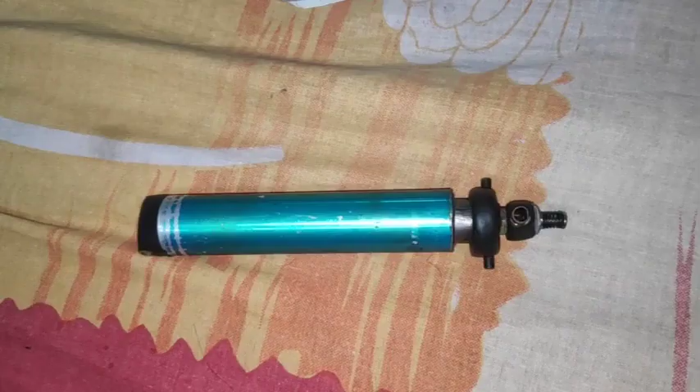A lot of my viewers asked me to show how this mechanism works. This is an all-in-one package: air pump, compression chamber, a valve, an inlet valve. It's a complete package. You don't need an external pump or anything else, just fit this in a gun and you're ready to go. It fills up by itself when you pump it, and it stores a lot of air inside. So this video is for educational purposes.

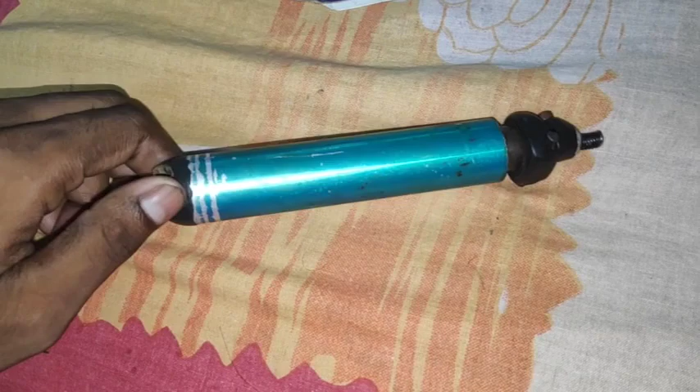Watch this video till the end, because I'll be explaining how this part works. This is a very good technology because it reduces the number of components needed for an air gun, and it has a lot of power. You can hunt small game with this mechanism in .177 or .22. I wouldn't recommend using it for .25 in a pistol, but if you use a big rifle barrel, you can use it for .25. For a pistol, stick to .177 or .22.

Watch this video till the end, because I'll be explaining a lot of things. So let's start. I have drawn a diagram of this system. I'll be dismantling this thing in a few minutes, but let me first explain the parts inside.

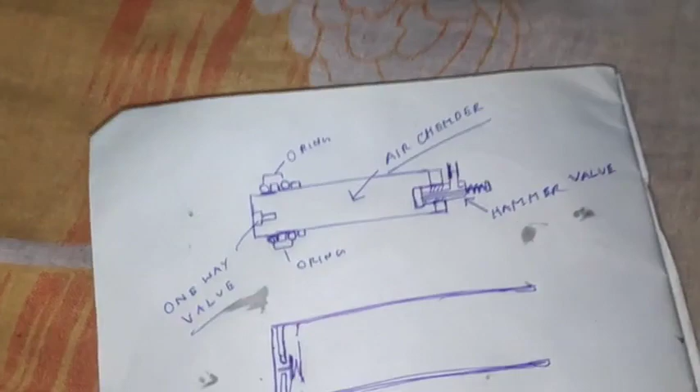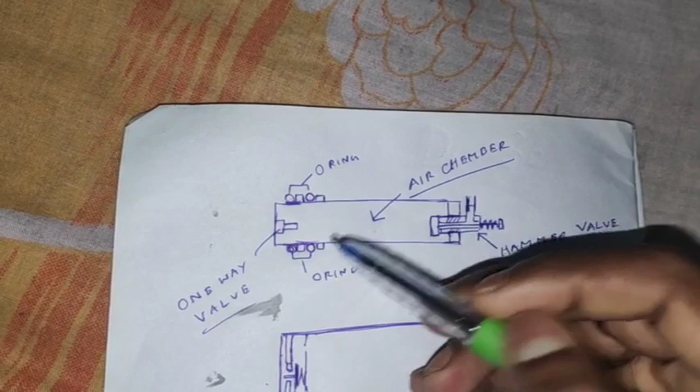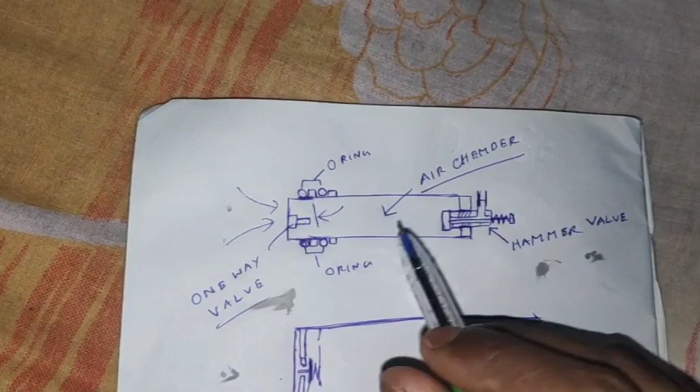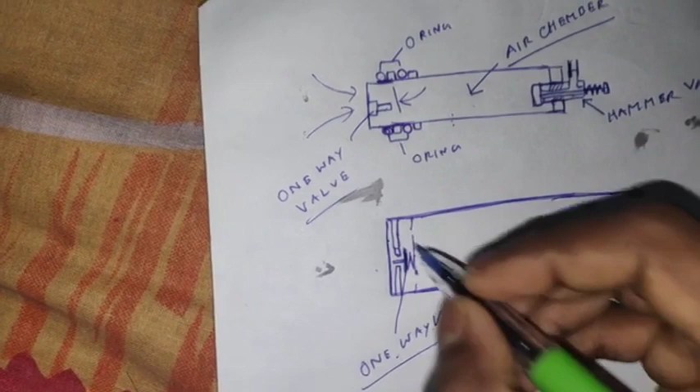First, this is the air chamber, and these are the O-rings, connected like a ring. I've shown this in a diagram, so it's chopped in a half pattern. This is the valve or hammer valve, and this is the one-way valve. The air can come through here, but it won't let the air go out. This is the outer part, which has one component only, the one-way inlet valve.

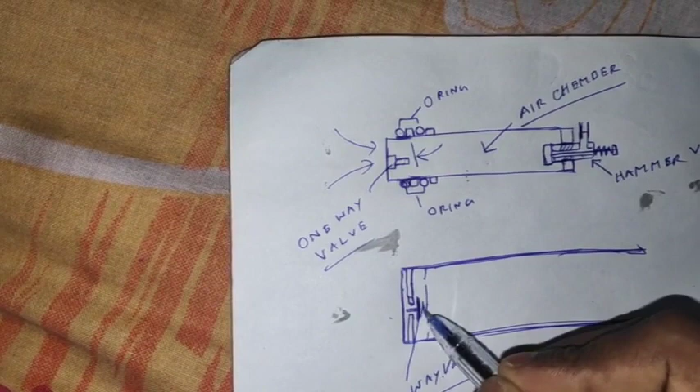This valve design is a bit different, because if I used the other type of valve, it would take up a lot of space. So I've used a tappet type valve with a spring, which pushes down and locks the air inside here.

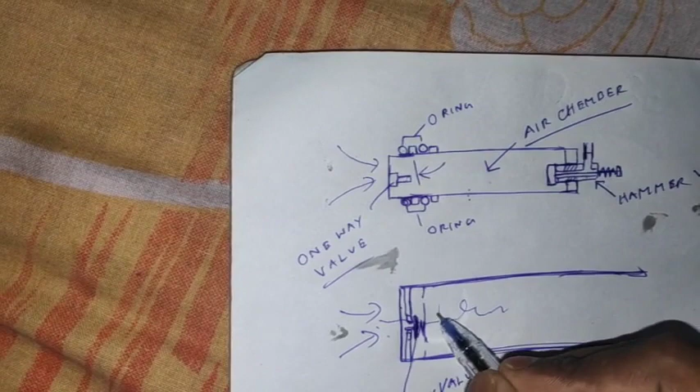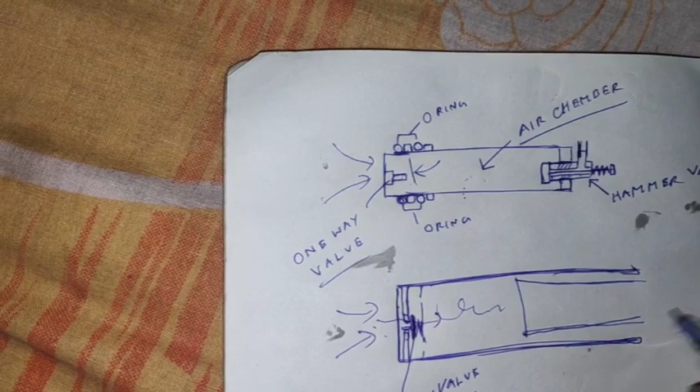So when the air comes in, it comes through here when this thing is inside here. Just imagine this thing is inside here. Let me draw this for you. This is the O-ring.

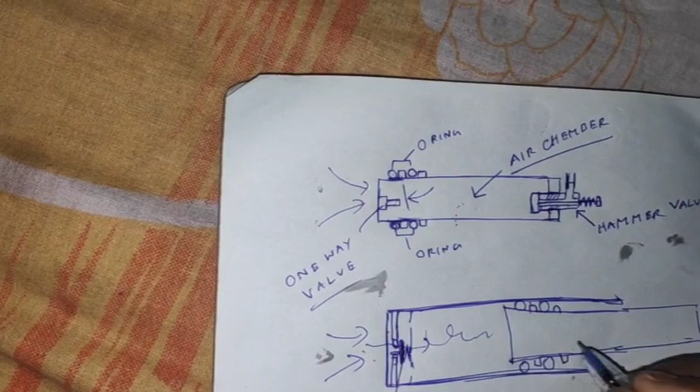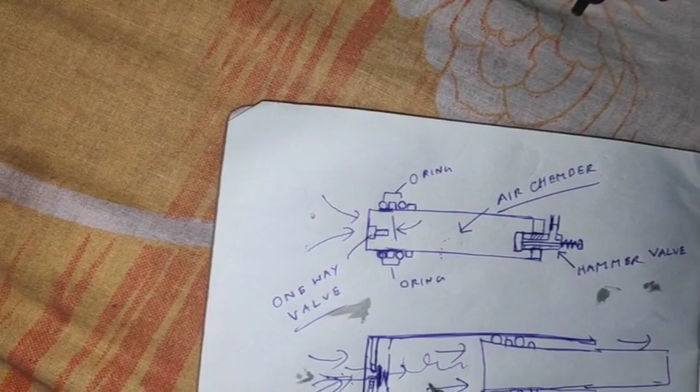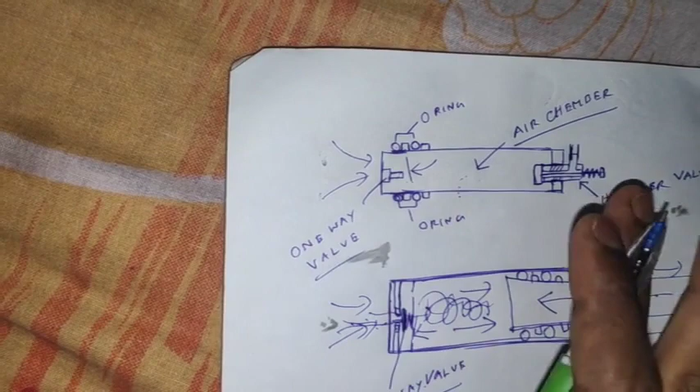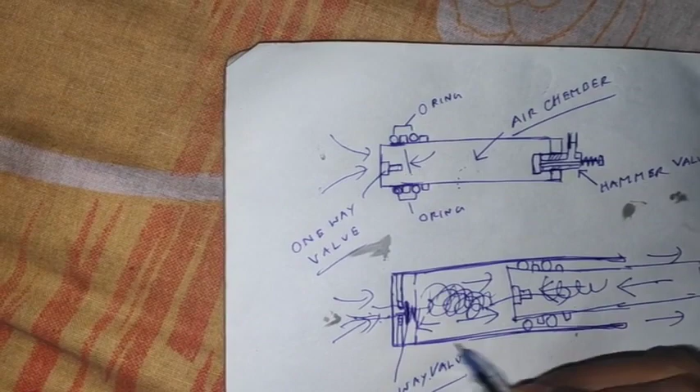Imagine I am pushing this down or pulling this thing this way. So the air is coming through here. Because this is a one-way valve, the air can come through but is stored over here. But when I push this thing back again, the air cannot go out because it is stopped. Then this valve comes into play, letting the air come inside and be stored over here. So that is one pump.

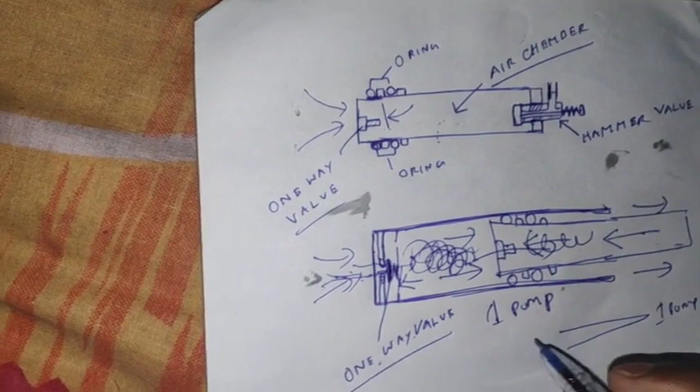From this motion to this motion, one pump. So if I continuously pump it, 1, 2, 3, 4, 5, 6, 7, all the air coming inside here gets dumped within here.

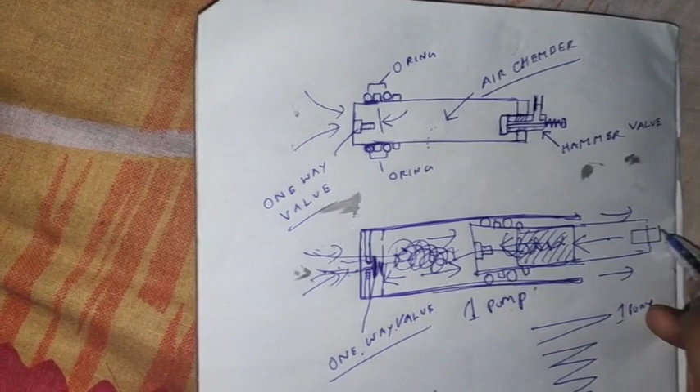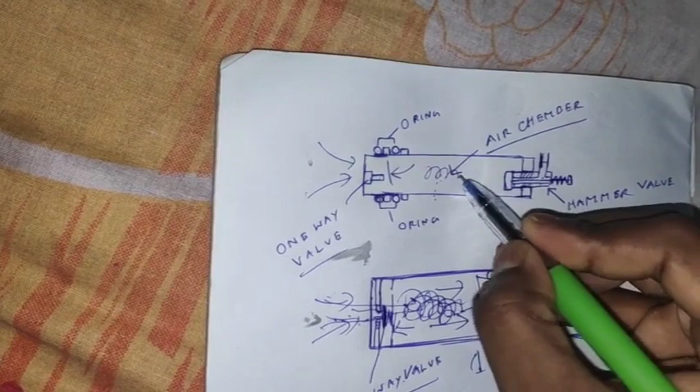So this chamber has a lot of pressure inside it, which is stopped by this valve. After I've reached maximum pressure inside here, I push this valve down, which will open up this valve.

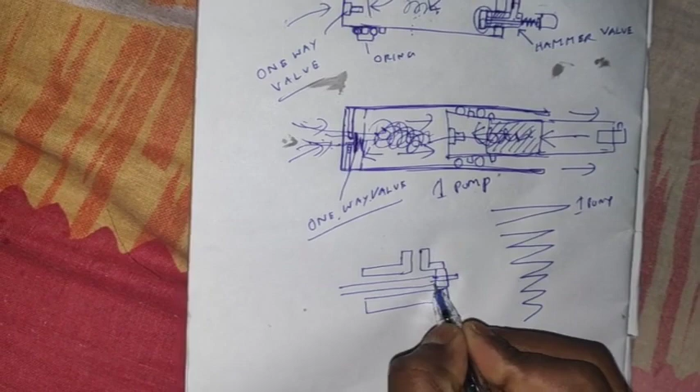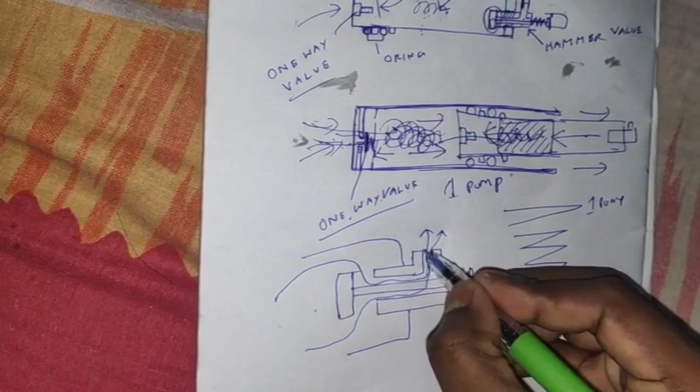Let me show this in a diagram. Remember, the valve is open now. This is the open valve. The spring is compressed, the valve is open, and all the compressed air rushes through here and comes out when the valve is open.

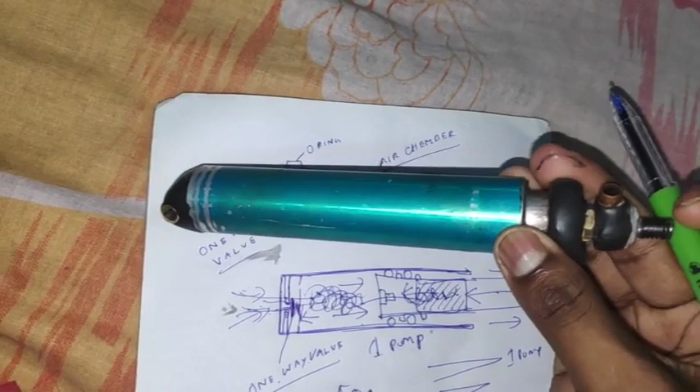So this is the main working principle. That means I have a pump, a compression chamber, and a valve, all in a single package. It's a very useful thing for a multi-purpose pistol, rifle, anything.

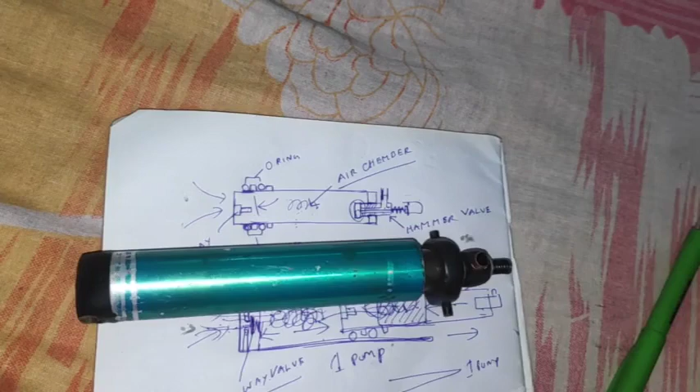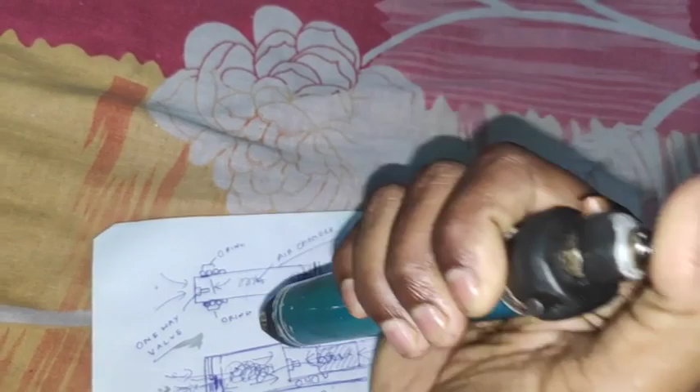And this thing packs a punch. Trust me guys, I've fired a lot of rounds through this. After pumping it almost 14 to 15 times, using .25 caliber BBs, when I pressed it down it kicked back like this. The .25 caliber BBs pushed so hard that my hand actually blew back like this. So this packs a punch.

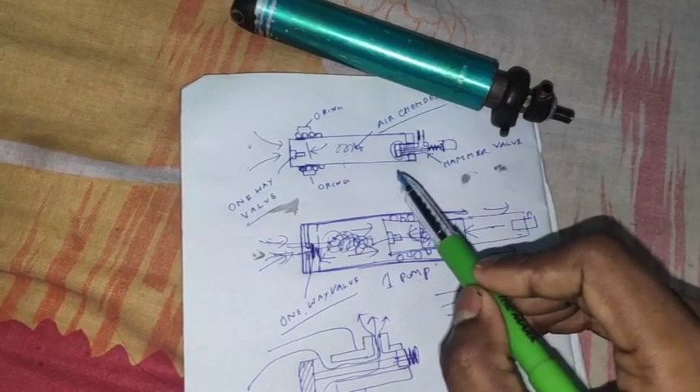So now I will show you the inside part. I have opened up the system.

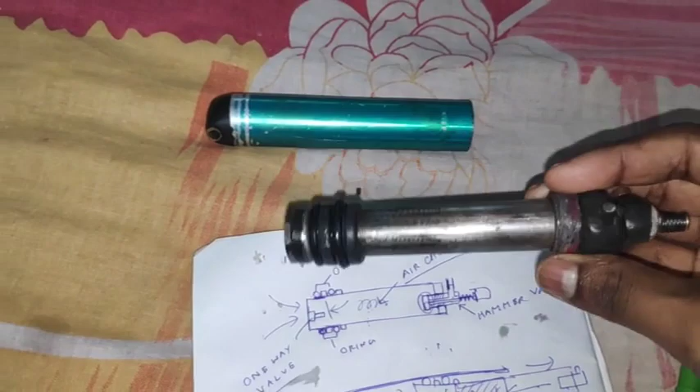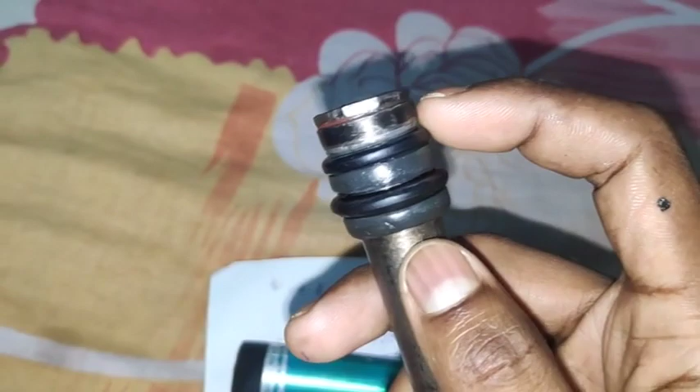This is the pump. You can see the O-rings over here, this one, and the one-way valve. This is the one-way valve.

I have made this in such a way that I can replace the valve when it is broken by unscrewing this. I can just take out the valve and replace it. It is not welded or glued, so I can replace it quite easily. You can actually use this kind of technique.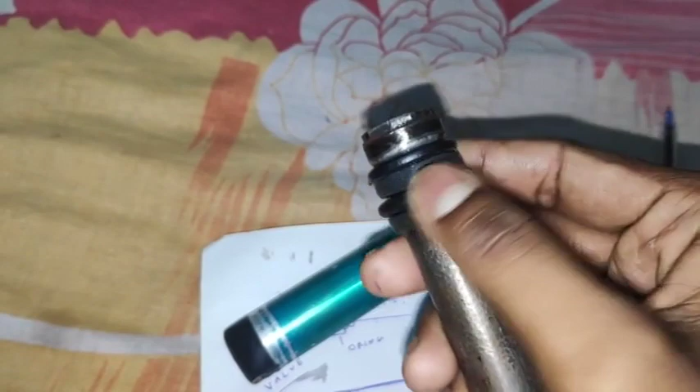It will be quite tough because this, you can see, is a solder. I have welded this part and this part using soldering paste, not a soldering iron. I heated this metal in a gas stove, and welded it with soldering wire. So you can use this technique.

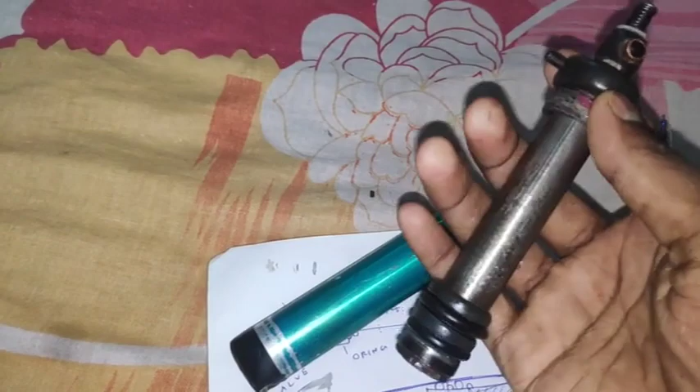And this is the compression chamber, this is the pump system, and this is the inlet valve. This is the one-way valve, and this is the outer part of the pump. You can see the system inside is quite clean, because it had to be clean or else the pump will not work.

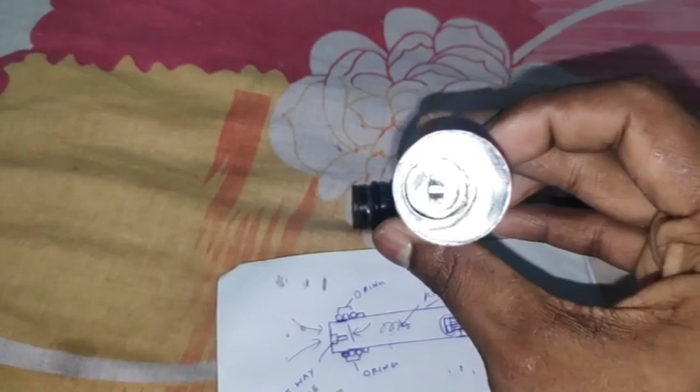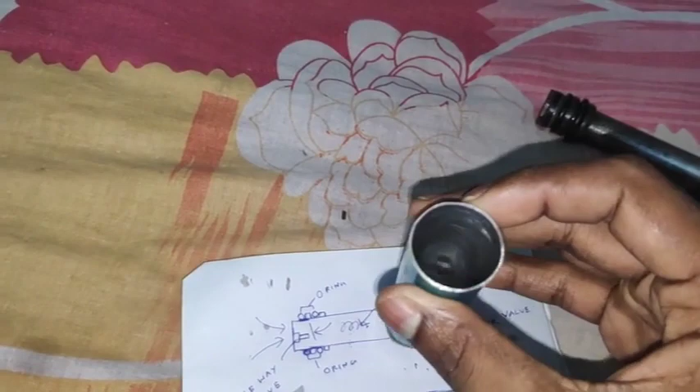I will also tell you where to find all this material. This is actually a printer roller. You can find this thing in any kind of printer roller. The printer roller may be this much long, so just chop it into half. Remember to actually use an angle grinder, because it will cut a smooth surface, or else it will damage the pump.

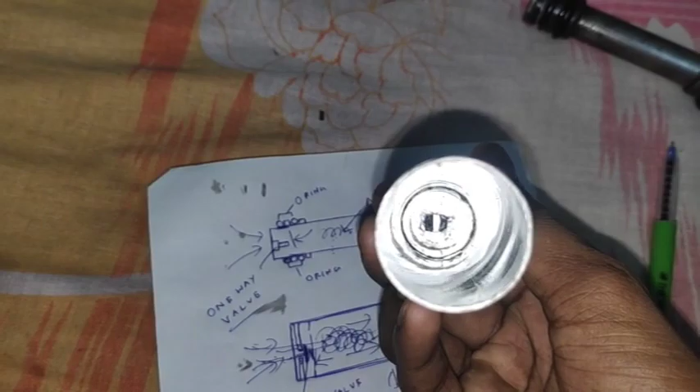And the inlet valve, or this thing, is inside here. You can see the bottom part, but the outer part is covered by M-seal, so you cannot see this. Okay, now to the main system.

Now I can't open this because there is an O-ring seal over here. If I open this, it will damage it, so I am not going to open this part, but I will show you the valve.

I have made this thing in such a way that I can replace the parts quite easily. Just wait, let me open this. I can open it by unscrewing it anti-clockwise, but I am holding my camera, so let me just put my camera down.

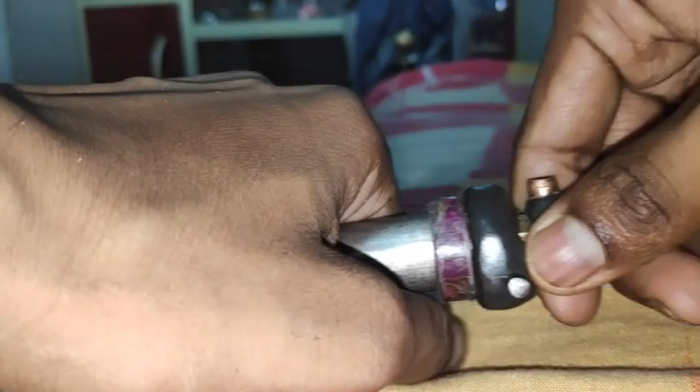I want to show you in front of the camera. Look, I am rotating this anti-clockwise, and it is coming off.

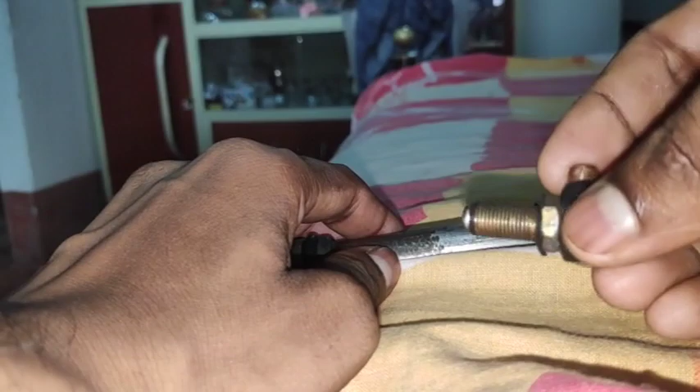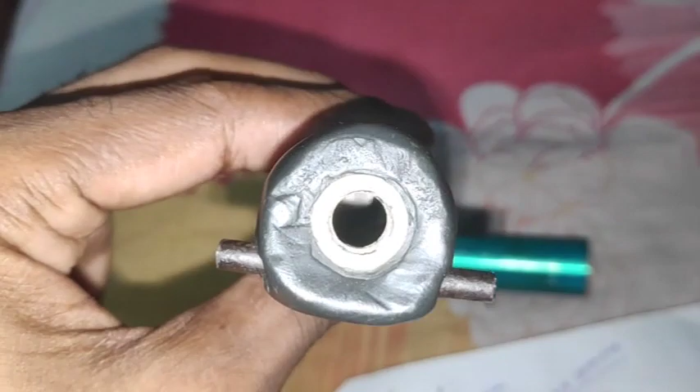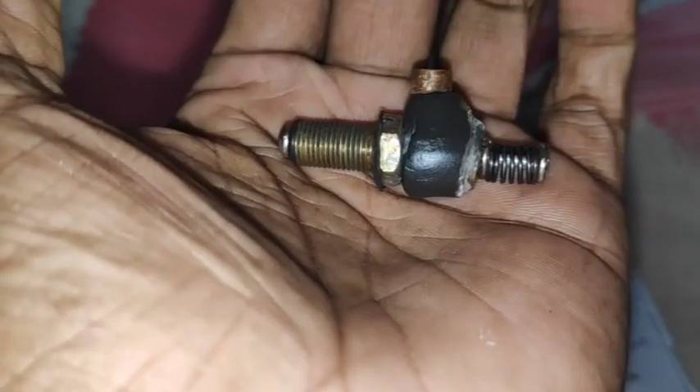If you want to build this, let me show you, I have opened up my system here. This is the chamber, and this is the valve. This is a very small valve, but it also has a higher airflow.

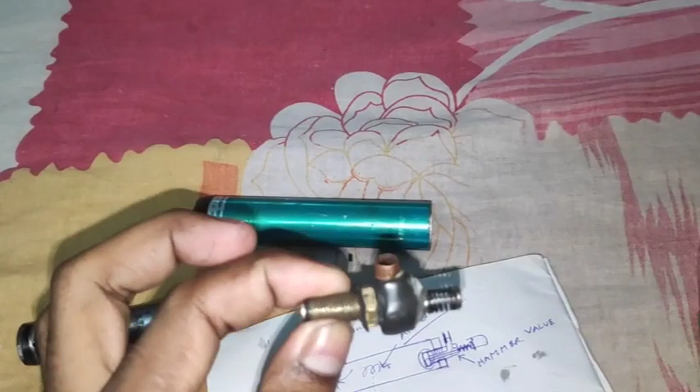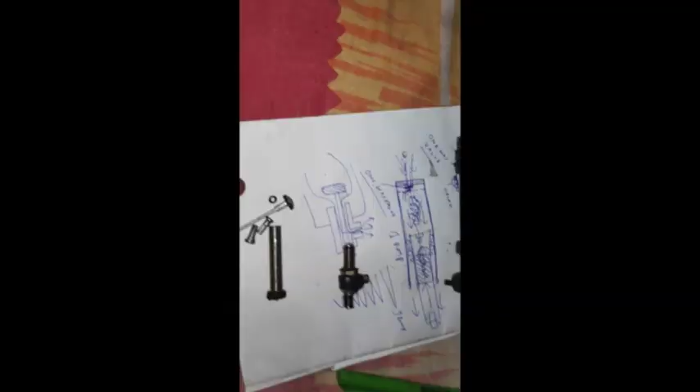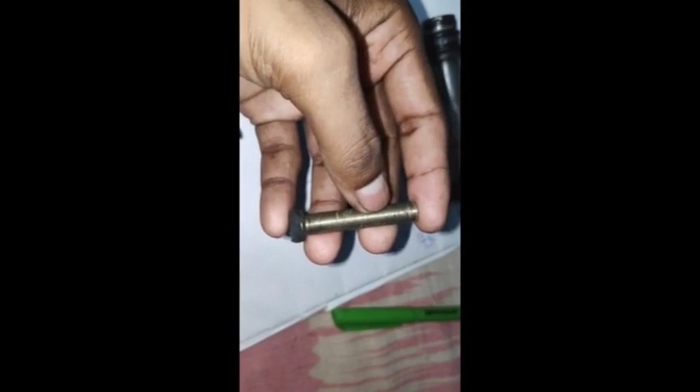To make this valve, you need this kind of part from a mountain bike tube. This kind of system is in there, so you need to chop it in half depending upon the length you need.

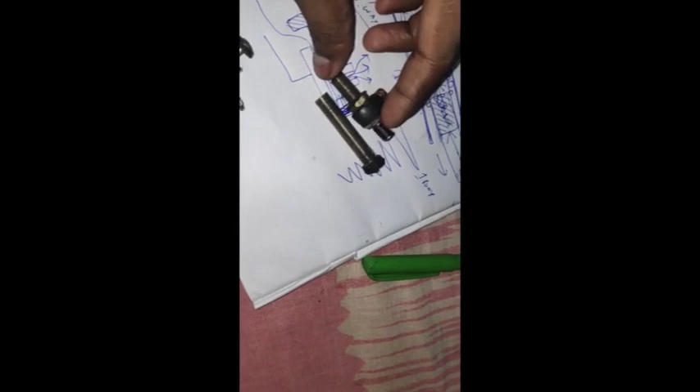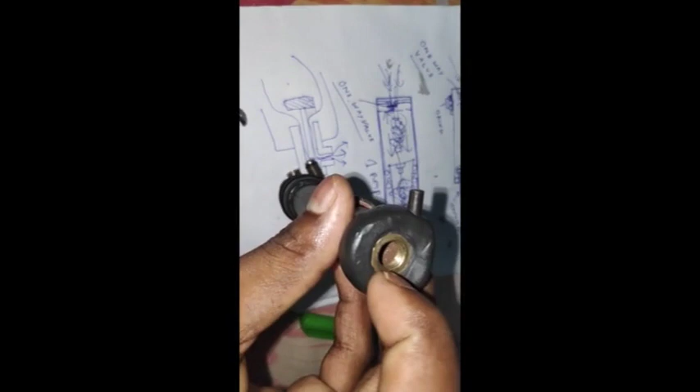And you have to get this nut, two of these. One will be fitted up to here, then you have to weld it, and another one will be welded over here. After that, you have to cut a hole over here.

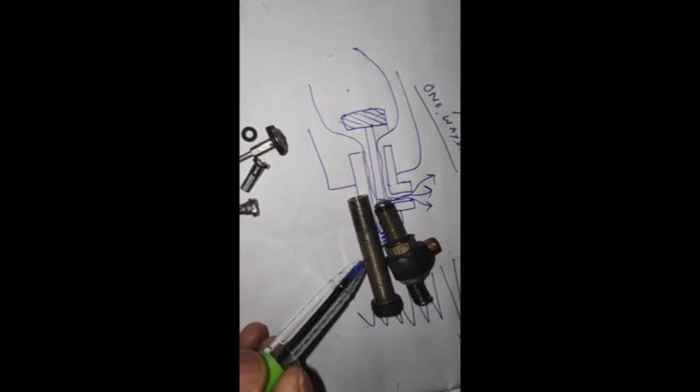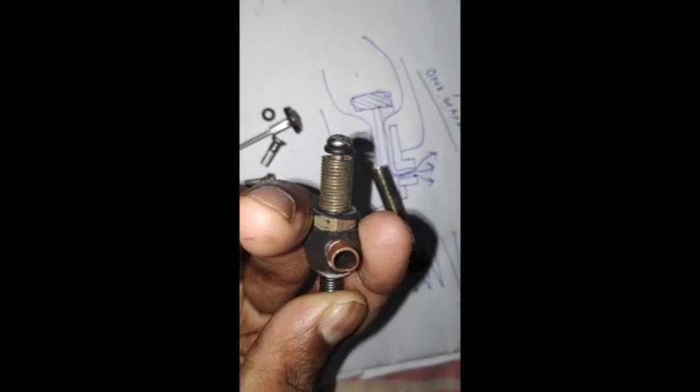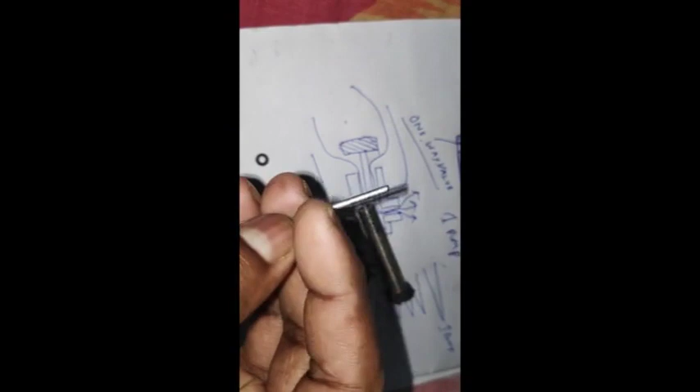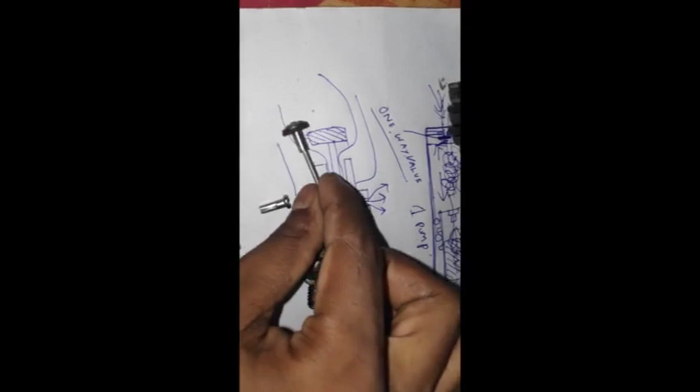And for a system like this, you have to use this, a cycle spoke. I don't know what this thing is called, but it's actually from a cycle spoke. Use this rod, this kind of thing, as the valve, and jam it inside there.

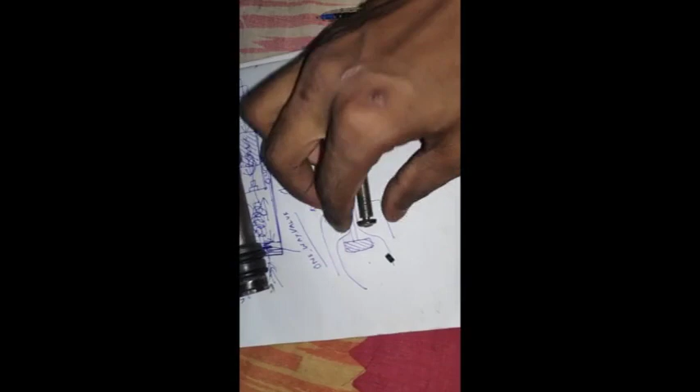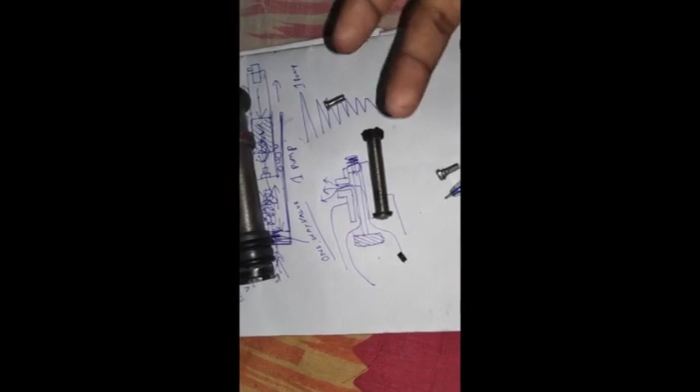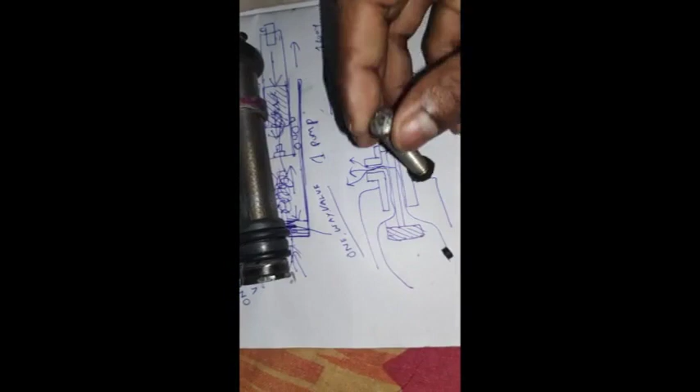And remember, there will be a hole over here that will let the air out, and that's it. So you will have a valve made out of a mountain bike tube, and this outer part will be the valve stem.

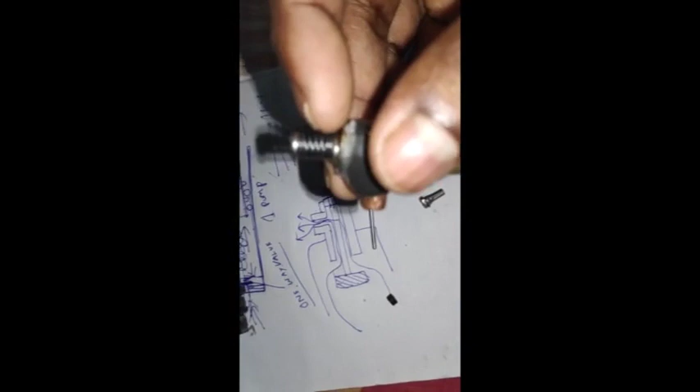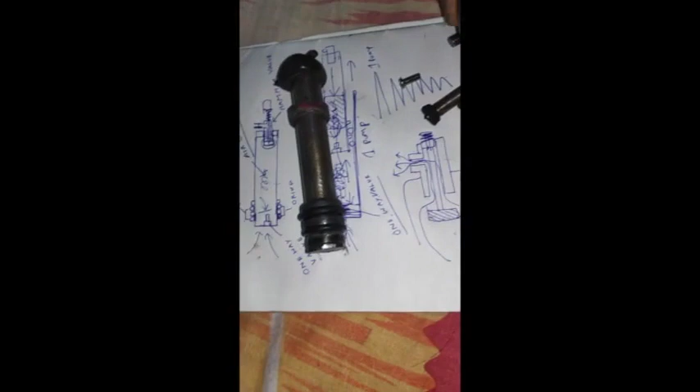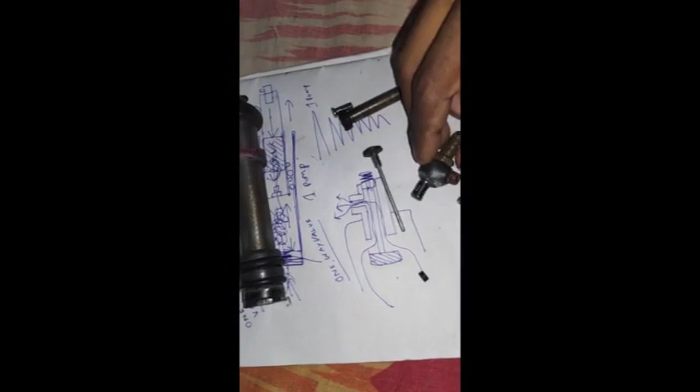Let me show you this part. I managed to find a tight spring like this. Use this cycle spoke part as a spring stopper over here, to stop the spring from flying out. So these are the actual parts needed to make this valve.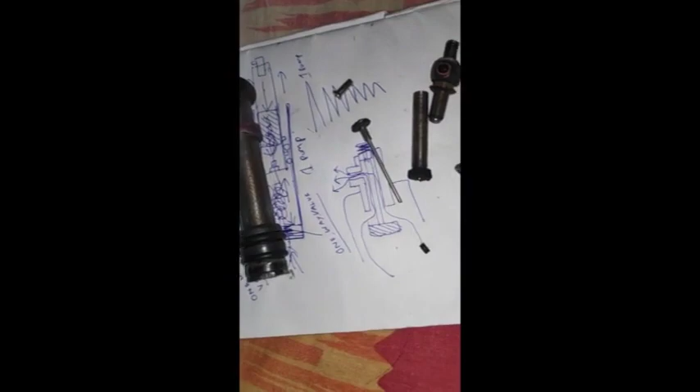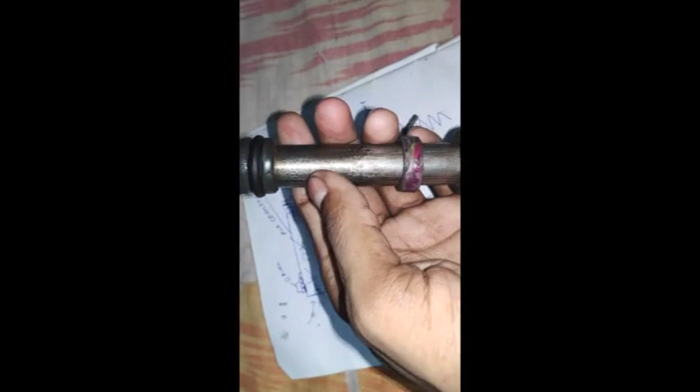So I have shown you the valve part, and that's it, you can make this. Actually, this is a complete tube, a tube from a bicycle pump's inner part.

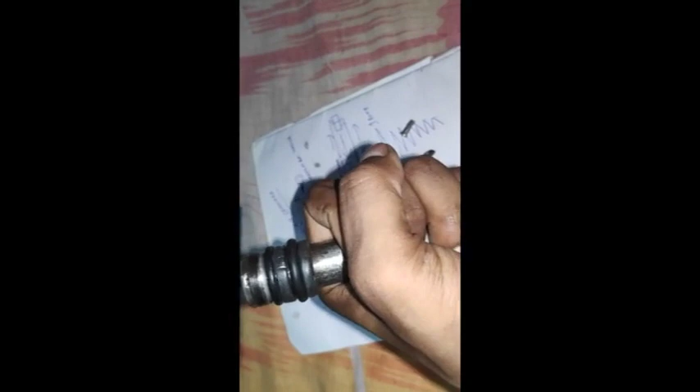You can make rings out of M-seal. This is a compound of two compounds, which when mixed together hardens and forms like a stone. I formed it into a ring, and after 3 hours it hardened, and it is used as an O-ring stopper or sealer. The air seals over the surface of this thing, so you can make it quite easily.

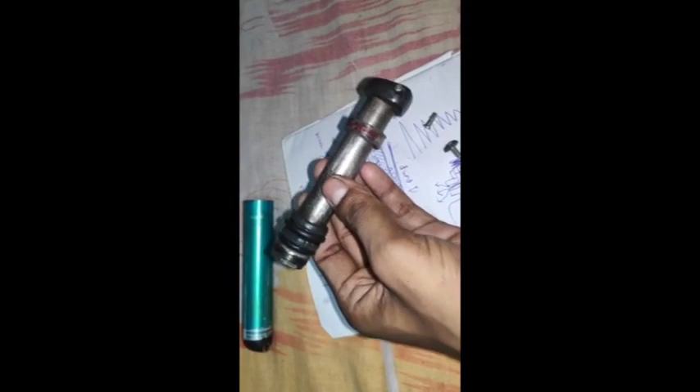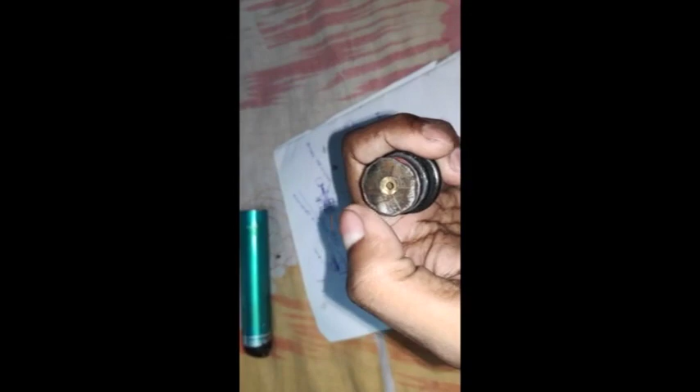You have to find the parts, and I have told you where to find them all. This was a big screw, and this is the nut. I sanded it down so I could weld it to this chamber, and this is the nut which I drilled a hole in and put a valve over here. Once again, I'm showing you.